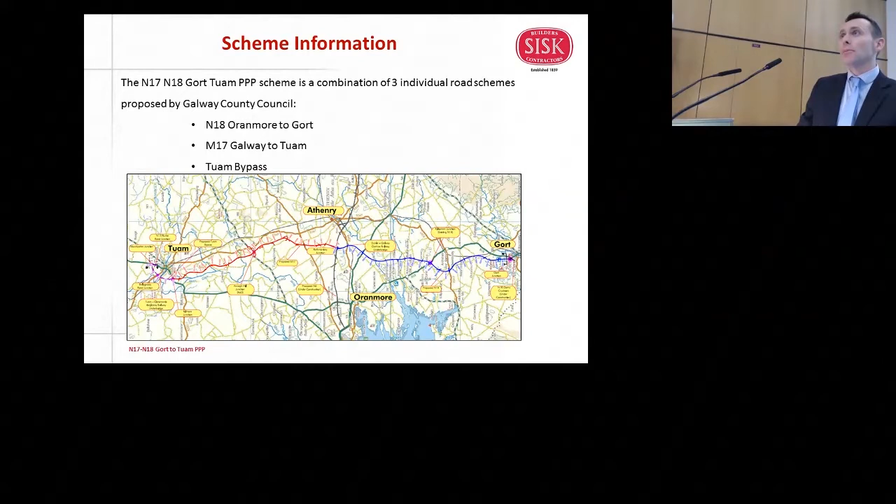The NRA then combined the 3 schemes into one PPP scheme, and it was tendered for in that manner. And the 3 schemes were the N18 Oranmore to Gort, the M17 Galway to Tuam, and the Tuam bypass itself. Obviously, in the west of Ireland, it starts off in the southern section at Gort, joins on to the Gort-Crusheen scheme, which is already opened.

There's a junction at Gort that travels in a northerly direction, bypassing the village of Kilcolgan, where there's a junction there at Kiltiernan. Continues north to the west of Athenry and to the east of Galway, where there will be a junction with the existing N6. Then heads on north from there, a junction with the N63 and the Roscommon Road at Annaghdown, and then eventually reaches Tuam 57 kilometres later and involves the bypass of Tuam itself.

The scheme itself will be a non-toll PPP, so the road user will have no tolls to pay on the road. The contracting authority being the National Roads Authority, who have selected Direct Route Tuam Limited as the contractor to build the scheme. The scheme itself had a contract close last year in April, with the road opening in early 2018.

Now, the PPP schemes as they're coming about more recently with the NRA involve not only the design and construction, but also the maintenance period within the scheme. So Direct Route hand over the project as a whole, including the maintenance of the scheme, in 2043, which is a few years from here and now. Alongside Direct Route, the funding for the scheme, as is with PPP schemes, comes from the European Investment Bank, and additional funding from Bank of Ireland, Societe Generale, and Natixis.

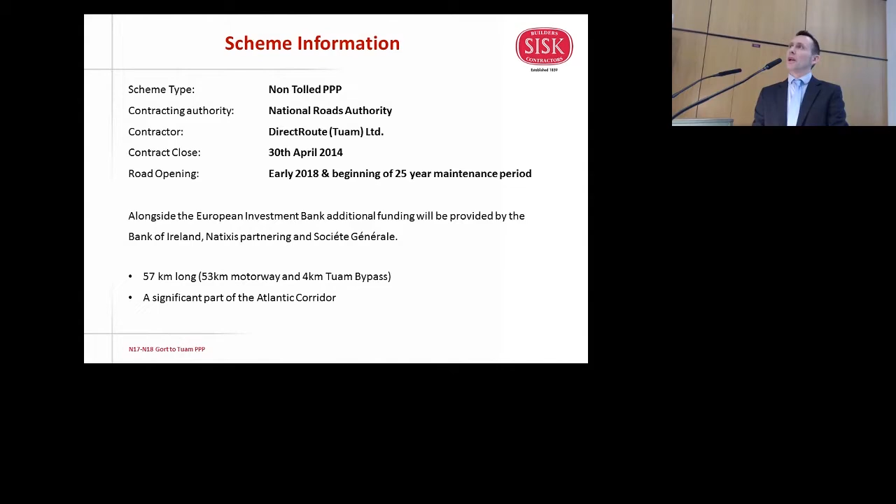So who are Direct Route, you may ask? Direct Route is a consortium that's been set up specifically for these PPP schemes. Because they're so large, there is an investment side to the scheme as well. The consortium targets design, build and operation of large NRA road schemes, and since 2004 has been reasonably successful in winning schemes with the NRA.

The first one in 2004 was the Rathcormac-Fermoy bypass, which is now in the operational phase. Similarly, the Limerick Tunnel, which was opened and is going through the operational phase as well. And now more recently, the N17 N18 PPP scheme, which is going through design and construction at the moment.

Direct Route, obviously, I'm here with John Sisk and Son, and the Fermoy, Limerick and Tuam companies all have Lagan Construction, Sisk and Roadbridge, as well as Strabag, as shareholders within the consortium, along with the different funding partners for each of the different schemes.

So making that all into one diagram, the organisation of the N17 and N18: the NRA are the client, Direct Route are the PPP company, and then the shareholders who are delivering the job on the ground. So Roadbridge are delivering the northern section, Sisk, who I work for, are delivering the central section, and Lagan Construction are delivering the southern section.

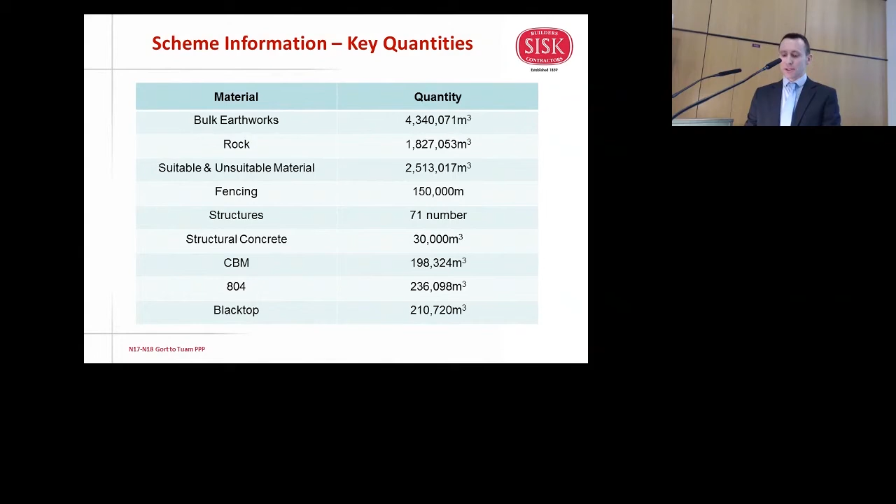It will be the largest construction project in Ireland over the next forthcoming couple of years. It's on our doorstep, and while it's large and it's challenging for the various aspects along the scheme, I suppose the key construction challenges that we foresee at this time is dealing with the peat around the Tuam end of the job.

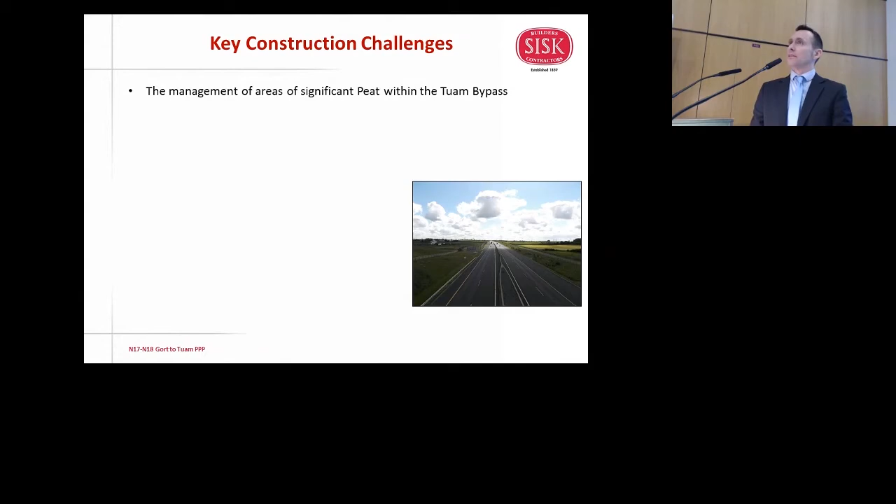The topography of the job is such that the more northerly part of the scheme is more influenced by peat and bogland, and then how we deal with that from a design and construction viewpoint will obviously be a challenge, that the design is robust enough to be able to accommodate all the different settlements and different design criteria that we have on it.

Construction then, the more southerly part of the scheme, especially at Gort, but comes up to just north of Athenry, where we have karst features within the limestone bedrock. So the more southerly you go in the scheme, the bedrock is at surface level. You're getting close to Clare. These karst features are within the bedrock. So it's again about designing and construction of the scheme with enough robust design to allow for the features and anomalies that are within the bedrock for the scheme.

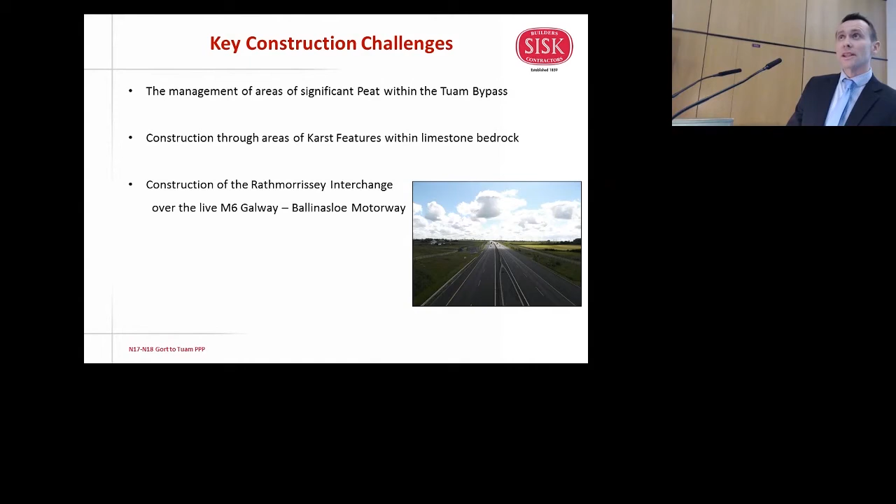Rathmorrissey interchange we talked about earlier on. The existing M6 Galway to Ballinasloe motorway is operational at the moment. We need to build a new 3-tier junction on that live road, as well as keeping the 2 lanes of traffic open in each direction throughout the scheme. So obviously a key challenge on how we sequence and program and deliver that section of the works.

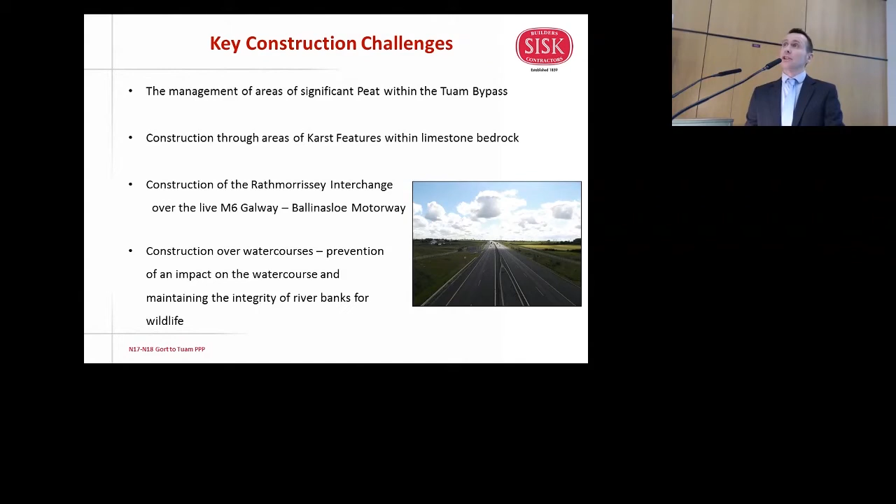And then along with every major infrastructure scheme that is ever delivered in the country, how we impact on the local environment, the flora and the fauna, and in particular on this scheme, the impact we're going to have on water courses and drainage, and how we mitigate what impacts we do have is obviously key. And that'll be a key challenge for us on the construction of the scheme.

The environmental challenges, talked about a bit earlier about the water quality and how we deal with that. Lough Corrib is an SAC, and we cross the tributaries, the Abbert River and the Grange River, which feed into Lough Corrib. And our drainage design and our structures design and how we impact on those rivers, obviously key. How we deal with sediment on the site, and how we attenuate and do pollution control for the drainage on the scheme. Big effect for the scheme and how we manage that.

So in our scheme, in our design and our construction, it's how we mitigate any potential impacts we have on those, and our design taking cognizance of what is there on site. And then rare plants along the scheme.

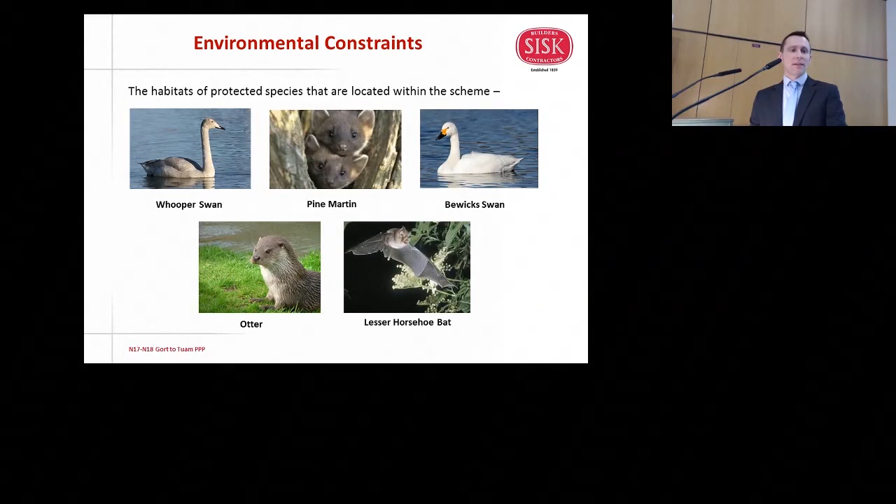Habitats along the scheme, which obviously we need to be cognizant of as well. The rivers, otters, the lesser horseshoe bat, pine martens, all the flora and fauna of the scheme. There are different things that we need to be mindful of. Our design and our construction sequence and methodologies are all developed bearing in mind these environmental constraints.

Within the construction industry, sometimes the environmental things get bad press, and maybe we shouldn't be doing bat underpasses. But really, at the end of the day, the environment is there for life. We need to build construction projects and be able to mitigate the impact we have on these. And it's only right and proper that we're developing schemes looking after the wildlife and the fauna that will be there long after the scheme is open.

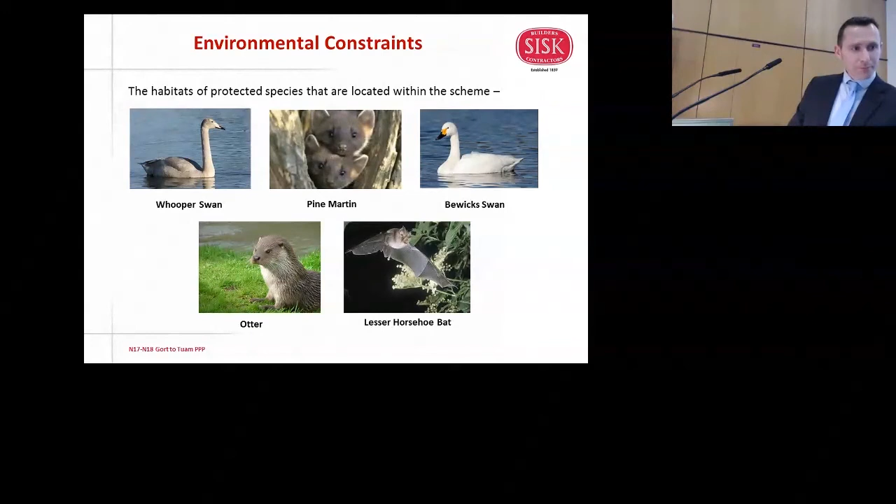Benefits of the scheme: an estimated 410 direct jobs will be created during the construction phase, and with estimates of 4 indirect jobs for every 10 direct jobs, we're talking about nearly 600 jobs created over the lifetime of the scheme over the next 3 years, which is a big economic boost to the area, not only for direct provision, but all the support industries in the local supply chain within the area. Big boost for the area.

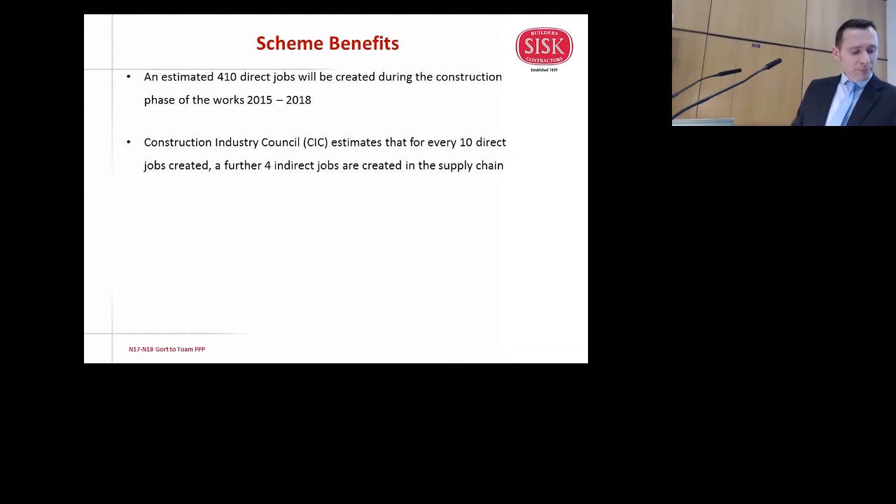Then the improved road network, which is part of the Atlantic corridor, which will aid and attract investment in the area. Improved quality of life in the regional towns. Anybody who's got stuck in Galway of a morning or a Friday afternoon knows it's no pretty picture sitting there in the car for half an hour. So maybe cut 20-30 minutes off the journey from Tuam heading south into Limerick. So there are major benefits for the scheme.

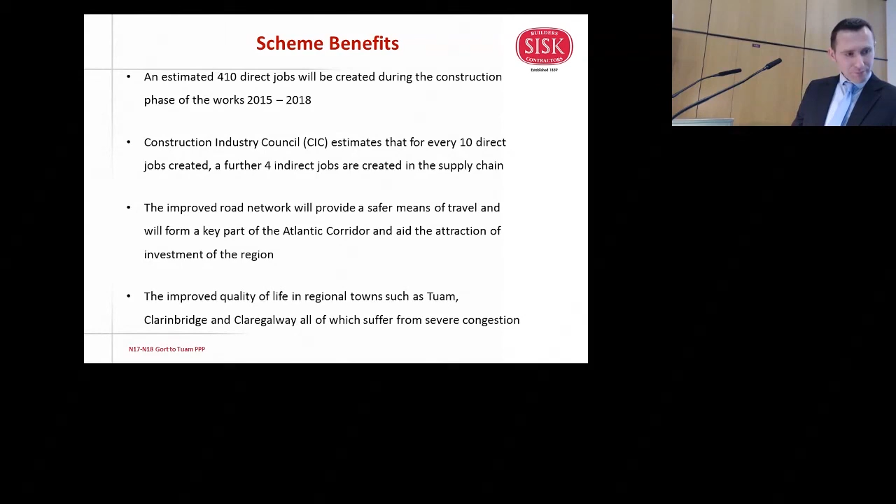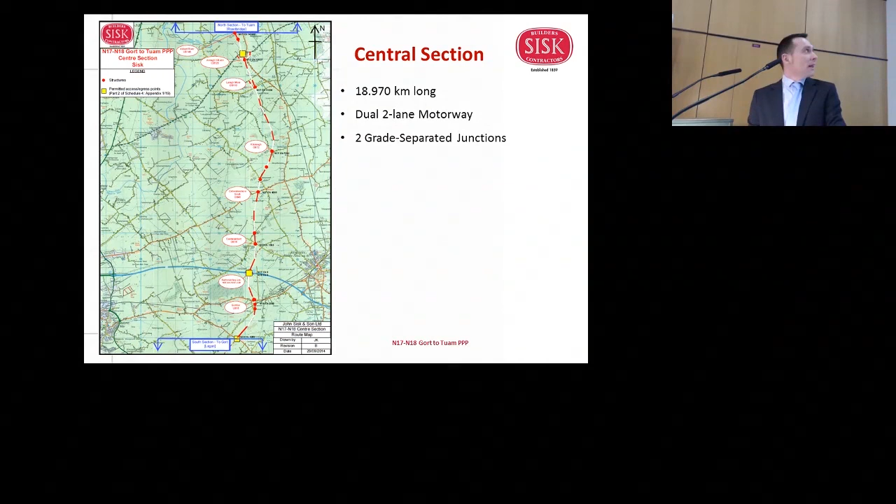Let's talk a little bit now about the central section, which Sisk are directly involved with. Nearly 20 kilometers long, dual 2-lane motorway. 2 grade separated junctions along the scheme, one at Annagh Hill, one at Rathmorrissy. The one at Rathmorrissy will be a 3-tier junction, allowing the M6 traffic to go unhindered onto the N17, N18. 22 major structures: a number of overbridges, underbridges, a railway bridge over the Dublin-Galway railway line, and different precast boxes.

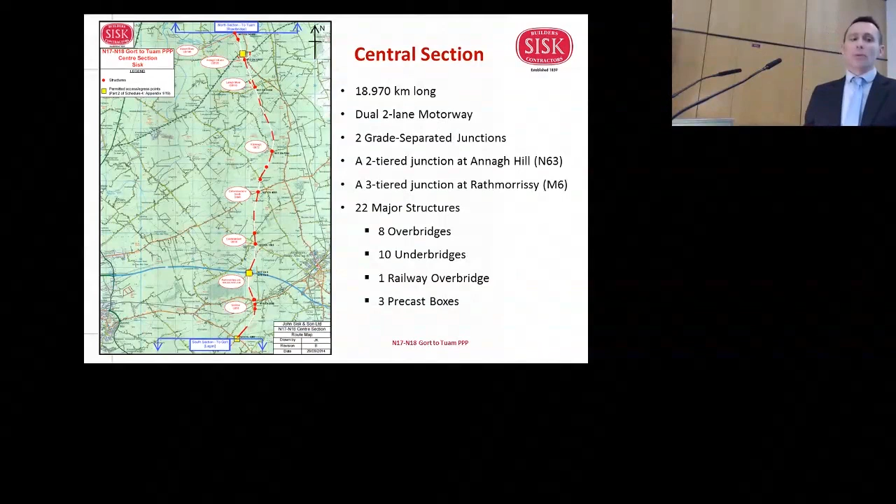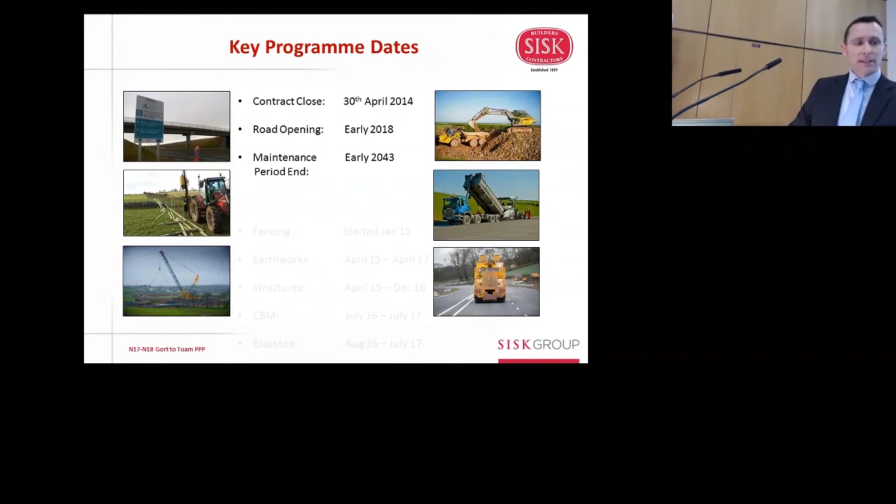Where we are at the moment: the contract closed last April. We've been doing a lot of design and planning for the scheme over the course of 2014 and early 2015. We're going to start construction work in April after the Easter holidays, when the weather in Galway gets better, the sun shines and the rain stops. Fencing and earthworks start in April, and structures will start in April as well for the good summer weather. Both the earthworks and structures take about 2 years, finishing up in late 2016, early 2017.

And then the surfacing and CBM contracts will start in earnest in summer of next year, all due to finish the scheme late 2017 for the opening in early 2018. Our investment in the area will then include the ongoing maintenance of the scheme, maintaining the road, salting, gritting, and renewal of the pavement for the following 25 years before we hand back to the NRA in 2043.